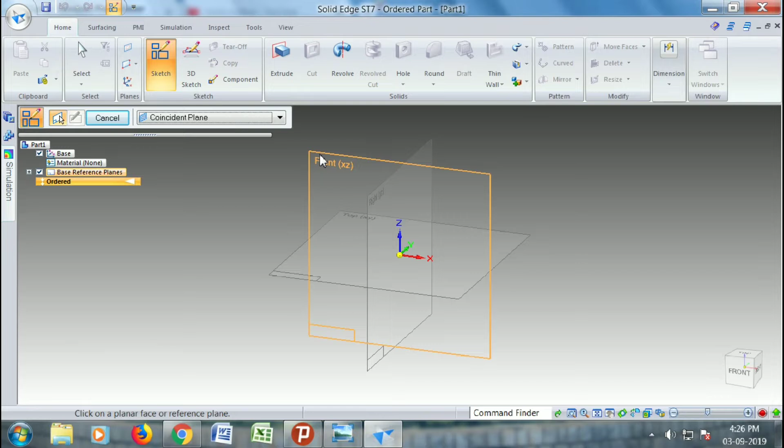Now let us go for the Solid Edge ST7, select isometric part option. So once you select that, you will enter this window and switch on the base reference planes so that it is easy for you to select. Directly go for a sketch and I will select the front plane because they have given the front view of the screw. Let us draw the axis, okay, and roughly draw the front view of the given screw.

So only half portion is enough because as we are using revolve extrusion, we will get the full screw. Go for smart dimension, give the dimension of that one. Okay, and they have given the dimensions. So look at this M12. So diameter is 12 mm. So we are going to create only half portion. Let us give the radius. It should be 6 mm.

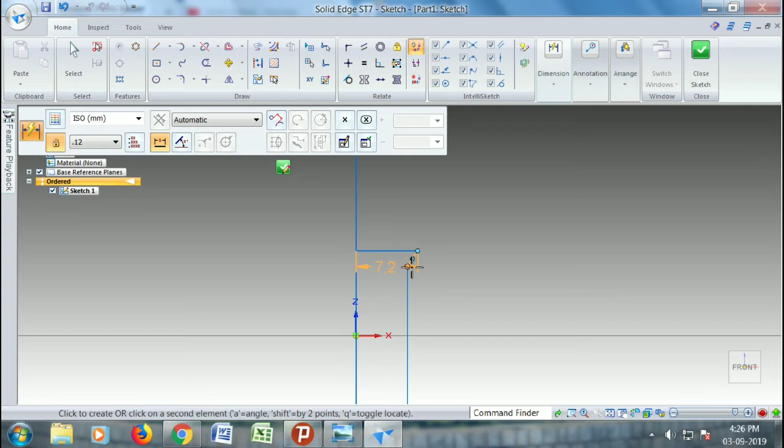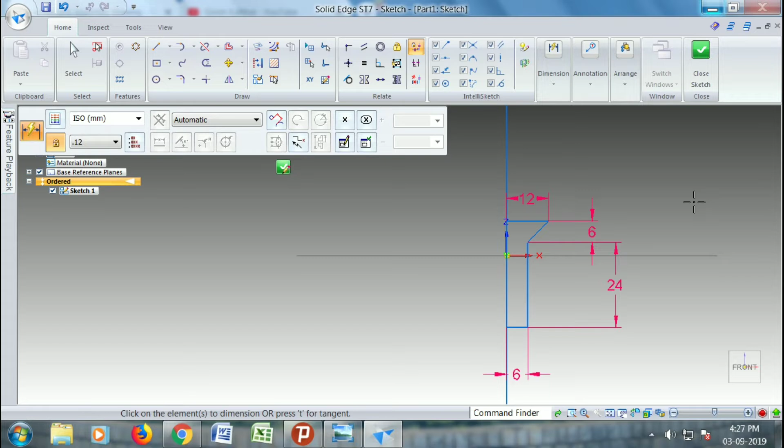Then go for smart dimension again. Give the head thickness. Screw head thickness they have given 6 mm. Then shank length. The shank length is 24 mm. Okay. So after this, let us check once again. So these are the dimensions and you can see head diameter is 24 mm. So you need to draw only half of that one, that is the radius. It is 12 mm. Let us enter 12 mm here. Okay, enter 12.

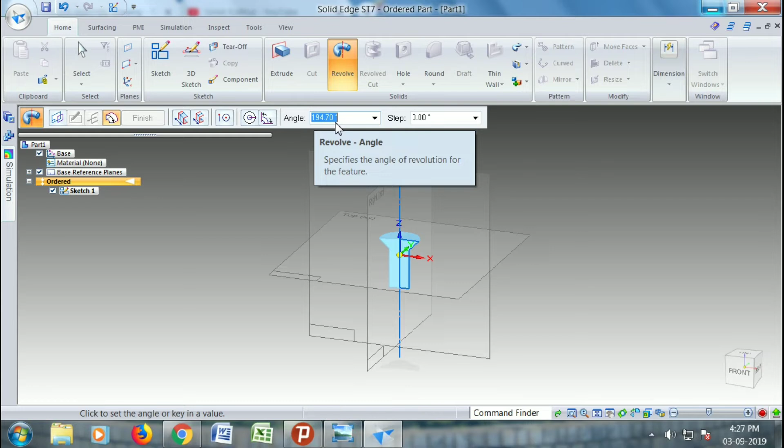So after completing this, just close the sketch. Okay, look at the dimensions once again before closing. Just click on close once you verify. So click on finish, go for revolve option in the Solid Edge ST7. Select the sketch which you want to revolve, accept it, then select the axis. So revolve it for complete 360-degree rotation. You will get the screw here like this.

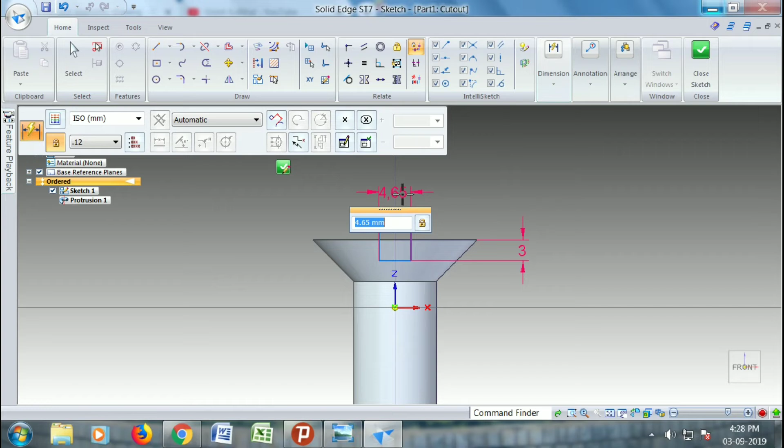Now go for cut option. So in order to rotate the screw, we need to have a slot for the seating of screwdriver. Okay, let us go for the rectangle by center point, then give the dimensions. And depth of that slot should be 3 mm and width of the slot is 2.4 mm, which they have given in the top view of the screw. So that you can see here. So I will open that sketch. You can see here, in the top view it is clearly mentioned 2.4 mm is the width.

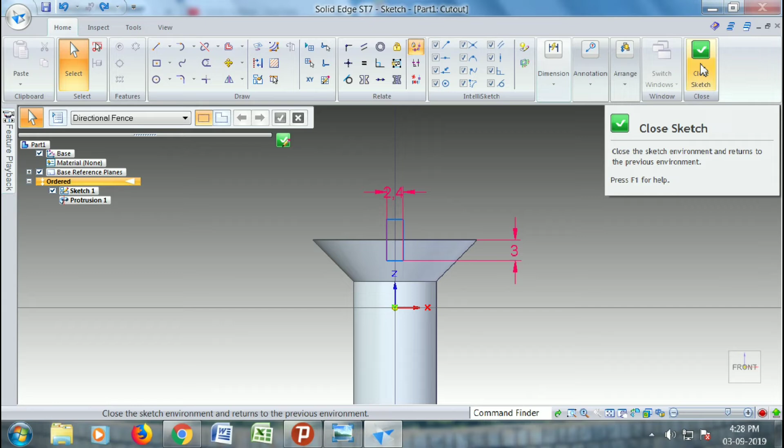So then it should be symmetric. So you can check the dimension once again. From the center axis it should be 1.2 mm on the other side. Close the sketch and do the cutout. Okay, finish. So you can see here this is a slot for screwdriver seating. Okay, now this portion should be chamfered. So for the easy movement you need to chamfer this edge.

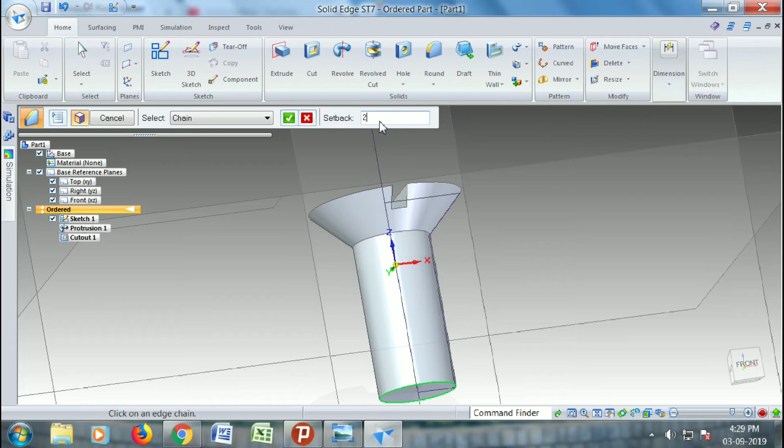Go for round option, select chamfer, select the edge and enter the value. They have not mentioned, let us say 2 mm. Enter 2 mm, press enter, click on finish. So you will get this chamfer. Okay, and they have created the threads on the shank portion. So let us create the thread.

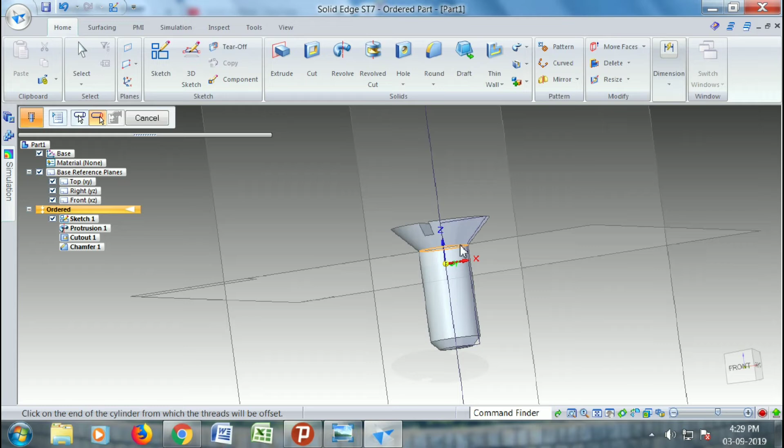For that, go for hole option, select the thread, standard ISO metric, type standard, and the diameter should be nominal diameter. Okay, so click on OK, select the shank, the surface where you need to create the thread, and select the edge. There is no offset they have given. Directly you can generate the thread, click on finish. Okay, you will get the threads here. So you can see here.

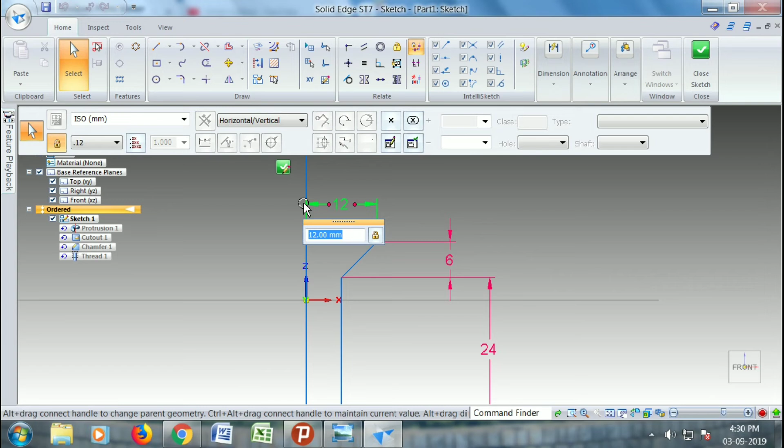And one more thing, as I have created the head diameter for 24 mm, that is 12 mm radius. Let us increase this to 13 mm. So why I am increasing this one, I will tell later. You can see here instead of 24 mm, I am creating a 26 mm diameter head of the screw. Let us go for revolve cut. Before that, go for sketch. So let us select the front plane.

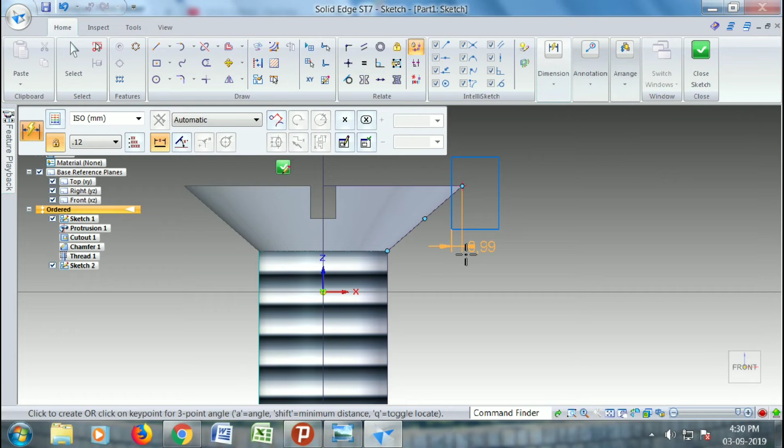Then I will just enclose the edge of that screw head, which is 1 mm, which I have drawn extra. Instead of 12 mm radius, I have drawn 13. So let us enclose that 1 mm extra portion here. So I need to remove that one because we don't want the sharp edge. So to avoid that sharp edge, we need to create extra 1 mm, and later you can remove that 1 mm using revolve cut option.

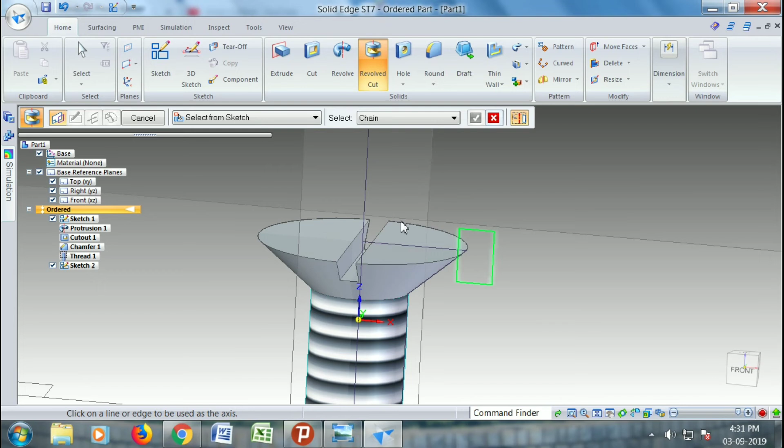Okay, so if you go for the revolve option, select the sketch, accept it, and it will ask for the axis. So the axis I have not created. Let us create the axis first, later we can revolve this easily. So how to create it? Let us go for the same sketch again, let us alter it, select the sketch 2, go for edit option, go for line options, let us create the axis. Okay, now close the sketch, go for revolve cut.

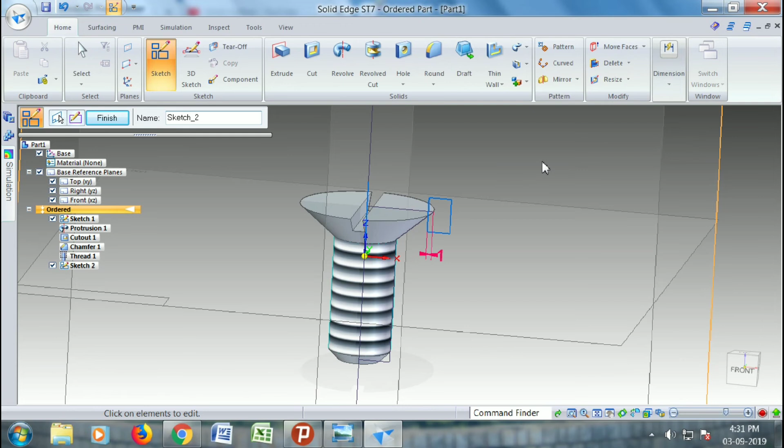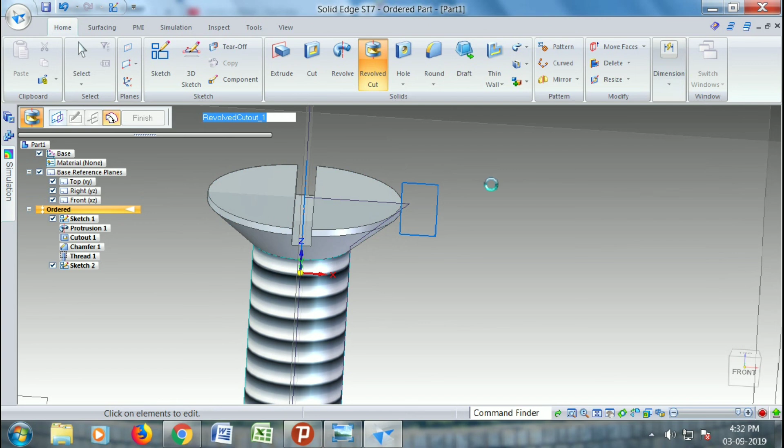Directly I will go for the revolve cut here. You can see here revolve cut, select from the sketch, this is the sketch I want to revolve, accept it, then it will ask for the axis, that is the line which I have created, select it and revolve it for 360 degree. As you can see here, the sharp edge is gone. Then you will get a flat one, you can see here. So this is how you need to create the screw for the screw jack assembly. Let us see the views.

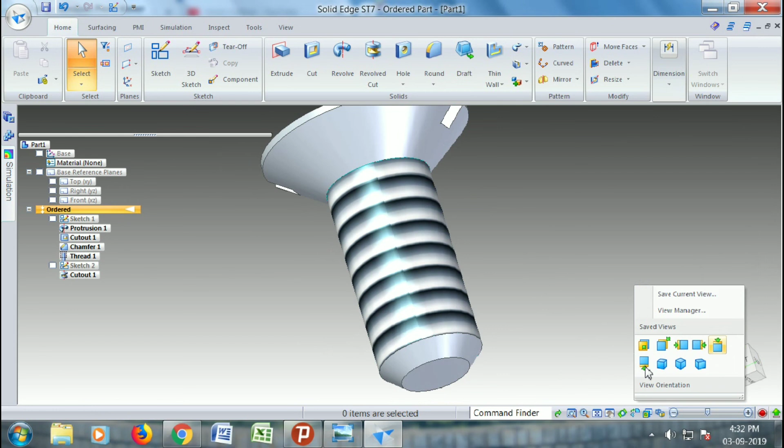As you can see here, this is the front view, back view, left view, right view, top, and the bottom view, dimetric, isometric, as well as trimetric views.